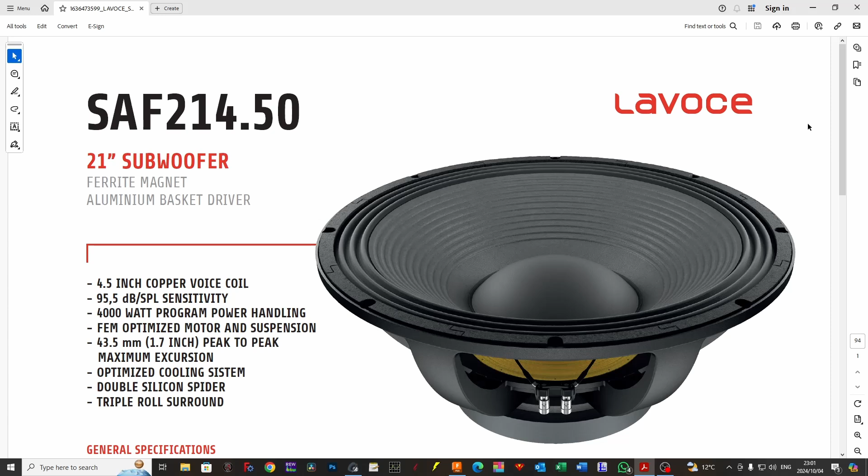So I want to cover a couple of things very important when it comes to making deep bass. One, 18s, while they go very low, if you want really deep bass, you need to get a bigger speaker, and 21s start to represent that better. And my choice for this is going to be a very well priced driver from Lavoce. This is the SAF214.50. I will absolutely emphasize this is not a premium driver out of the Lavoce range, but value for money. This driver is capable of going all the way down to 30 hertz and doing so relatively efficiently.

The downside, however, is the fact that this particular driver is recommended to be loaded into a box that is 300 liters. That is roughly the same size as a double 18. So keep in mind, you are going to be trading off a really big box for a single speaker just to get a little bit lower in frequency. That is something that a lot of the hi-fi guys understand, that if you want to go really low, you need a really big box, right? People like to refer to it as Hofmann's iron law, which I think is a terrible context about subs, but whatever the case is.

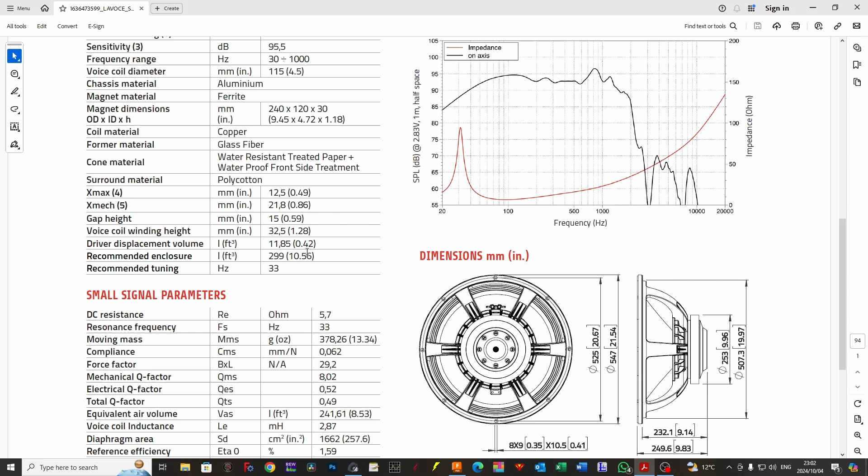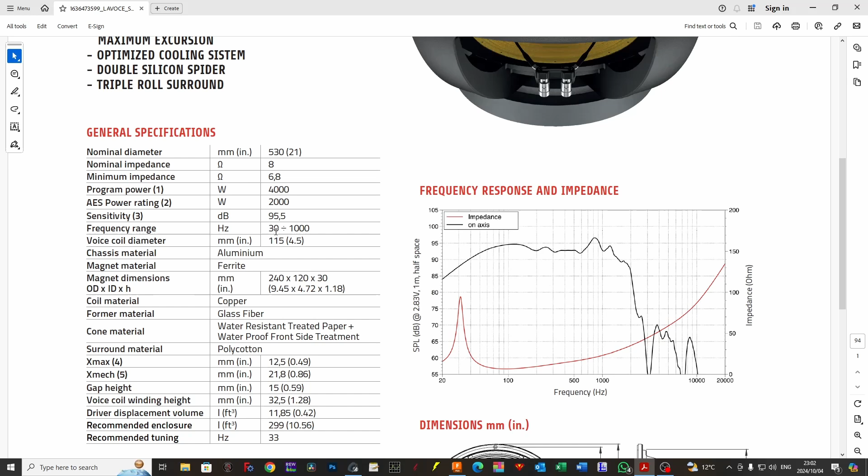So 300 liters tuned to 33 hertz is a pretty big box, but that's what we are going to need to get down to these low 30s. Typically speaking, if you have a subwoofer that can play down to 40 hertz relatively well, it will do so with absolute authority. However, as you come a little bit lower down to 35 hertz, 30 hertz, things start becoming pretty hard for any speaker, generally speaking.

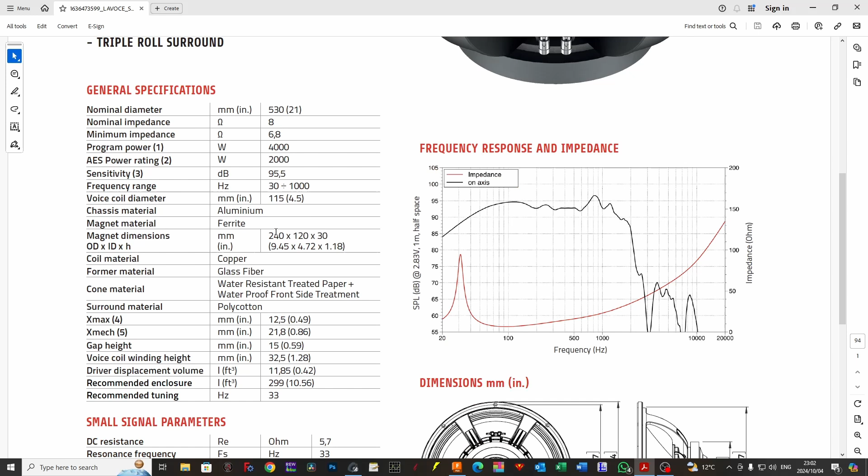So what I've done is I've already whacked the driver into a default WinISD cabinet, and I'm going to do this live with you, hopefully relatively quickly, because it is pretty late on Friday evening. I'm trying to squeeze in a few more videos.

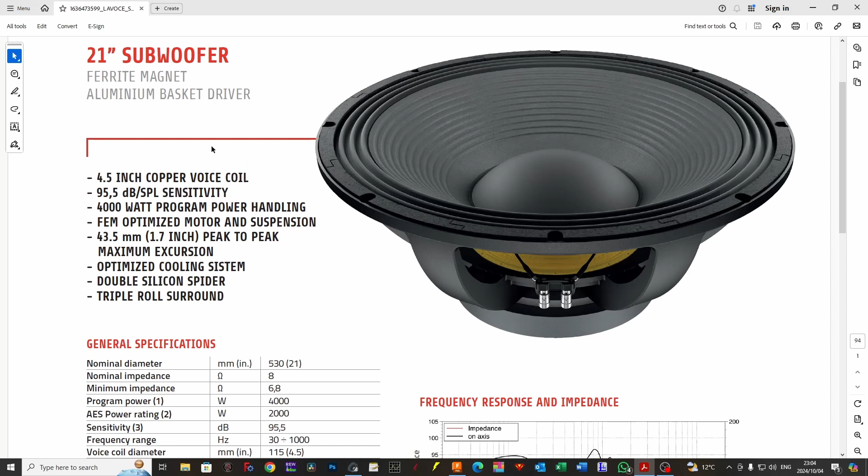Right, so we've got to jump into a couple of things here. Let's quickly have a run through of the driver. The driver has a 4.5-inch voice coil, so not the biggest voice coil, and I can understand why guys do that, because we're trying to keep the motor force relatively high. We don't want to increase the mass too much. Big voice coils means lots of length of copper. Things become heavy very fast. Inductance goes up very high.

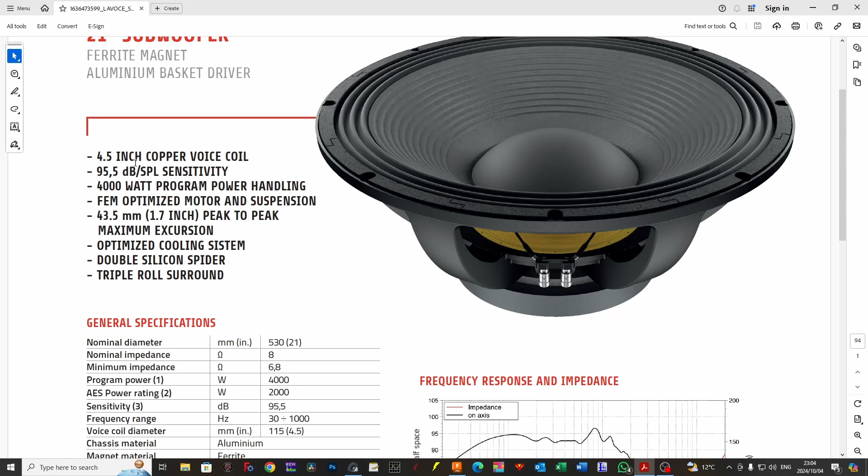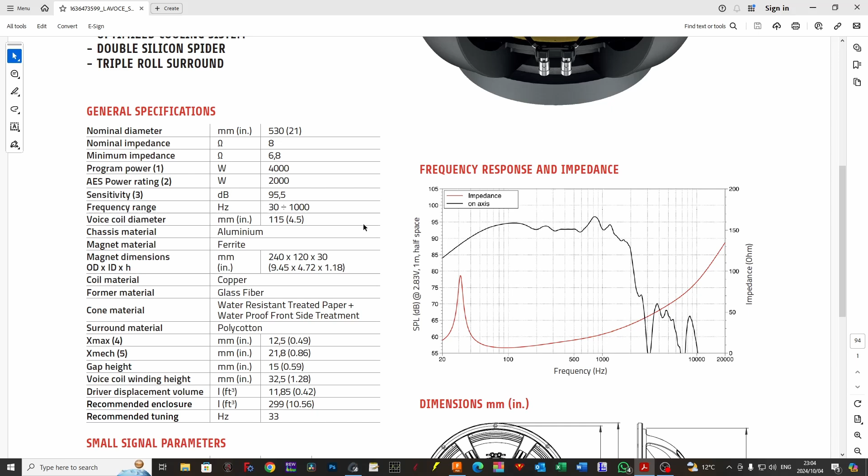4,000 watts program power. Program power is for sissies. We want to look at AES. So an AES rating of 2,000 watts. Typically speaking, if we put about 500 watts RMS into this with 6 dB worth of dynamic range, we should be floating around our AES. We can obviously put a lot more into that, so we just have to keep in mind that we are going to run into excursion and everything else. But if you want a happy-go-lucky driver, yeah, let's have a look here.

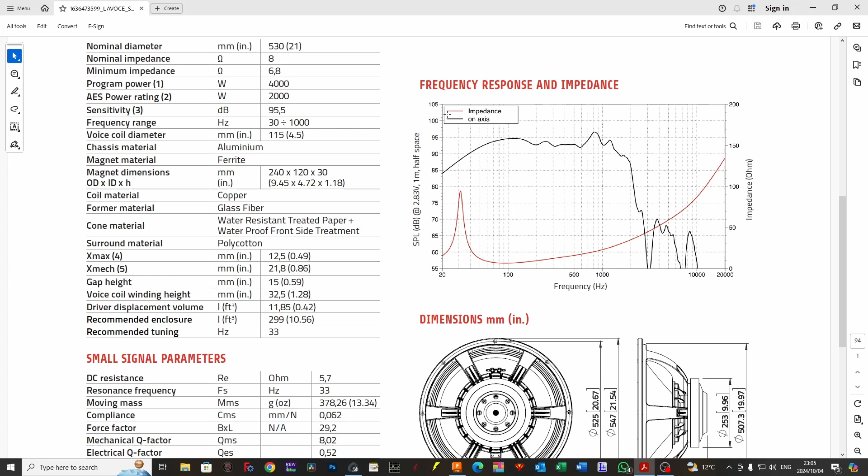All right, 12.5 millimeters of cone displacement. It's a fair amount of cone displacement. Again, guys, always look at the fine print, see how they come up to this X-Max value. It should come out to just over 8 mils: the voice coil minus the gap divided by 2. Yeah, so somewhere around about 8 mils.

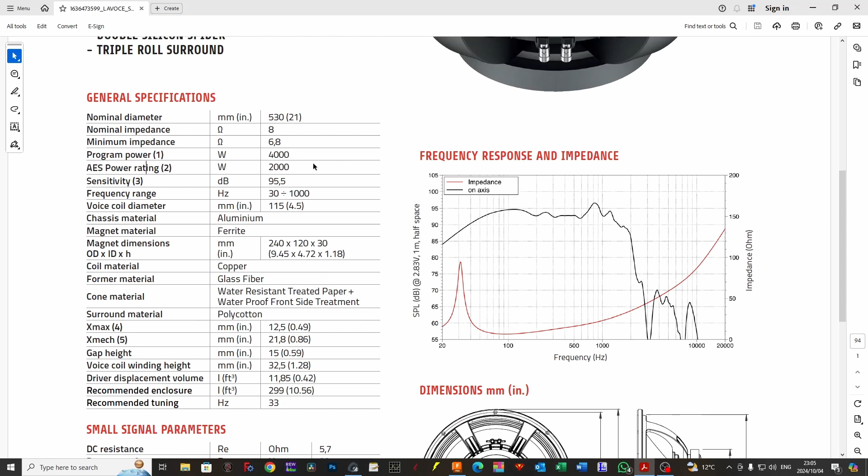Power handling, they are rated out to 2000. Okay, cool. So very important, again, I've mentioned in some previous videos, is the driver's resonant frequency, 33 hertz, which again is relatively low, right? Most 18s are like 35 hertz, sometimes a little bit higher than 40 hertz. This driver is a slightly higher Q, right? So electrically as well as your QTS.

Let's go and have a look at things like our cone excursion signal. Let's go and have a look. So they rate 2000, so I'm going to be guessing we're going to be sitting at about 1300, somewhere around there. A little bit short, 1400 watts. Okay, so how did I come out to 1400 watts? Well, basically I have used the box suggested volume, right, which is 300 liters tuned to 33 hertz, and I have just approximated roughly where I think X-Max is going to top out.

Now, something that is very important when you get into your speaker box design and using something like WinISD or any tool for that matter, guys, if you are tuning very low, it's important to understand that that driver will hit peak displacement sooner. So there is a fine line between how deep we go and how loud we can turn things up.

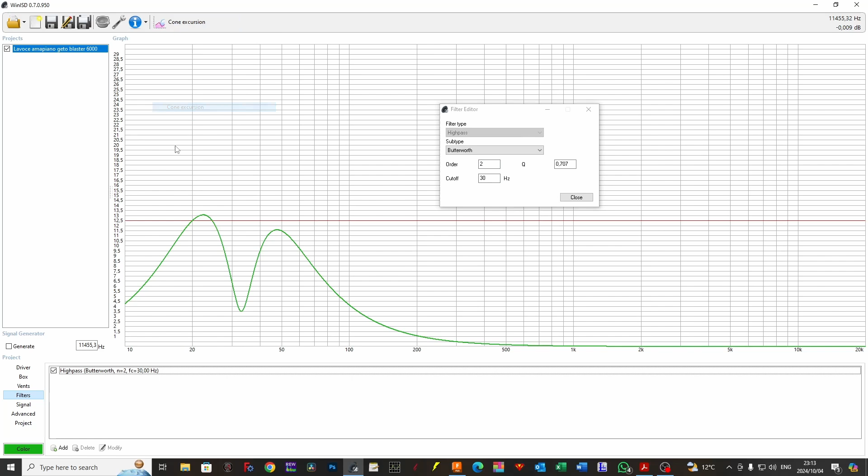So let's have a look at a third order versus our second. It's going to give me a hard time now. Third order versus our second. You can see that there is a very small difference. Now this would be a relatively good start at bringing in our cone excursion. So again, this is going to affect our overall power handling.

I don't like running speakers to the absolute limit because I want to avoid things like power compression and everything else. And if I have a look at 1,000 watts, which is half of our maximum rated power, that's a pretty high value still. Typically speaking, I might run somewhere around about 500 watts, maybe a little bit more. Possibly about 65, maybe 70 volts on the top side, depending on the amount of time that we're going to run things. So I'm kind of happy with the order that we have over here. I know somewhere in between that region, we're going to be keeping cone displacement relatively good. Our air velocity is also going to jump down.

So if we wanted to, we could in fact consider making this port a little bit smaller. So I could come in here and say 120. You can see we've shortened by 20 mils. Our overall port becomes slightly smaller, and our vent resonance is also going to push up, which actually is quite an important thing to bring up quickly.

Guys, it is very important, especially for the people who are doing hi-fi. Vent size is actually something that is quite critical, and a lot of times people get it wrong, purely because the resonance modes of your port will often start messing you around and will start floating in between your crossover points. And if you don't push it out high enough, especially if it's very audible, it's kind of stuck there. You can't remove it. Once it's there, it's there. So keep that in mind.

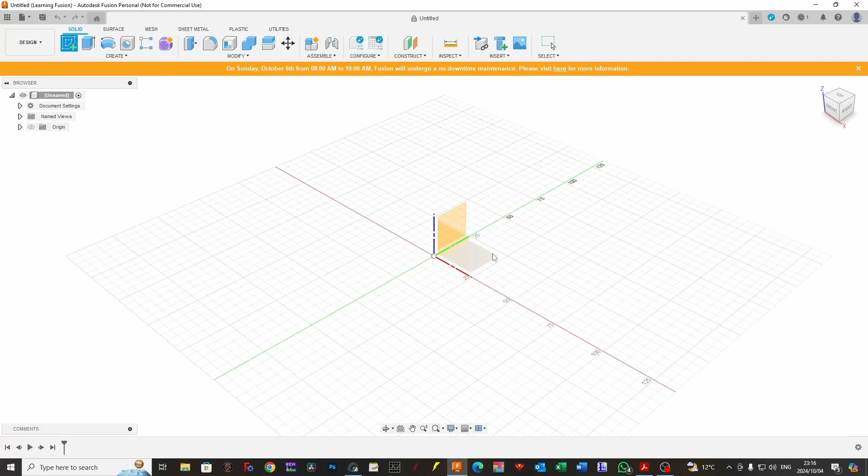Okay, so let's jump into our drawing package, which is going to be Fusion 360. What I'm going to do is look at the speaker from the top down, just to simplify things. Now, remember the size of our driver. We are on 21 inch, so we're 547 mils in diameter from the very top to the very bottom. So if we use a face that is roughly 600 mils, we 100% know that we're going to fit on there. So I am going to draw in some form of rectangle or square.

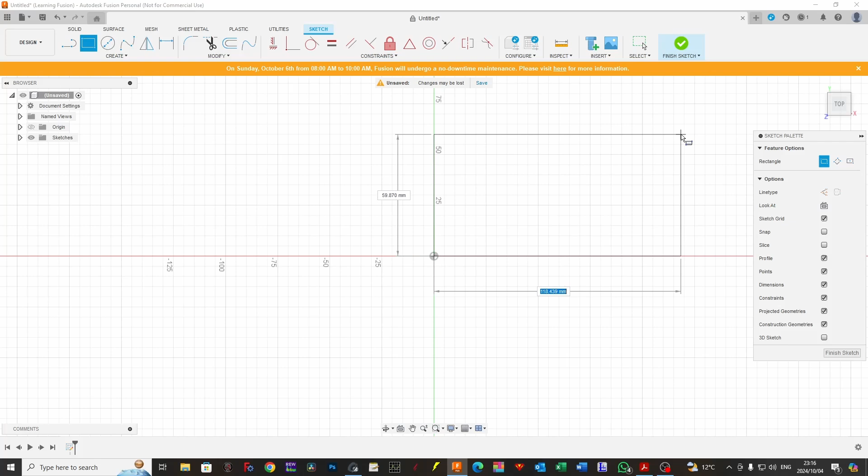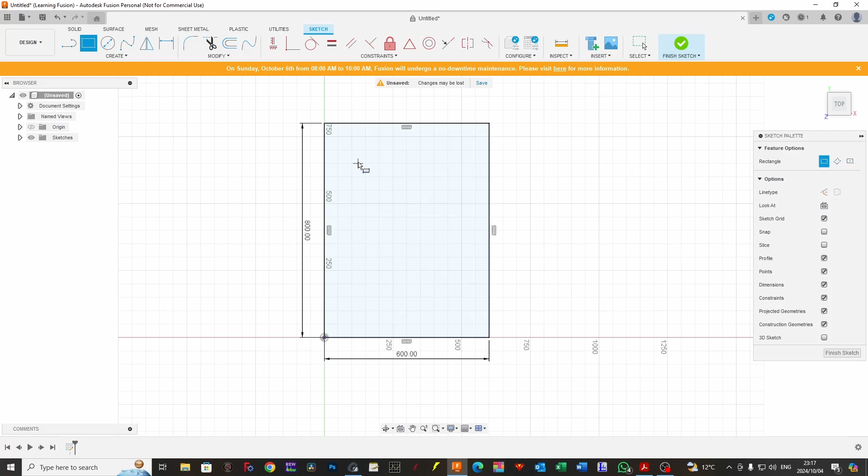I'm just zooming out quickly. So if we say 600 millimeters wide, and let's make this guy 800 millimeters deep, or 80 centimeters deep, and click OK. We now need to start adding in some more pieces to this. The first thing I'm going to add on here is some side panels. Again, we're looking at the driver from the top down. Now I can manually enter in the thickness of our material and snap things into place. Or I could do the following, and I'm going to just tell it that it's locked to that.

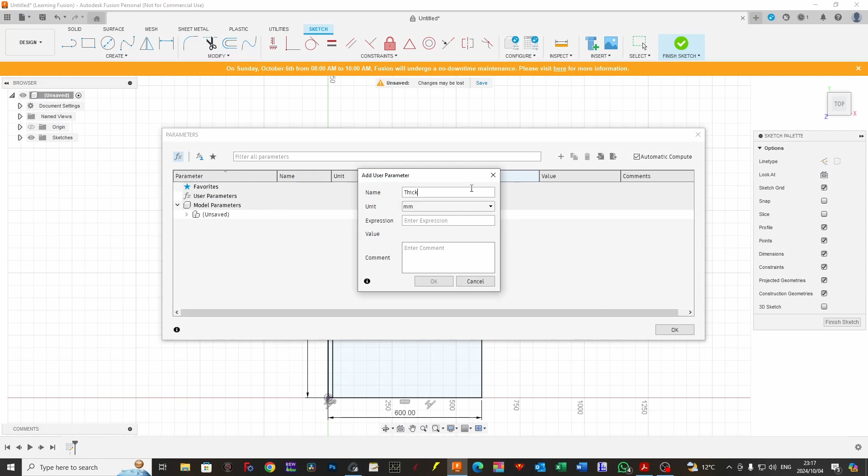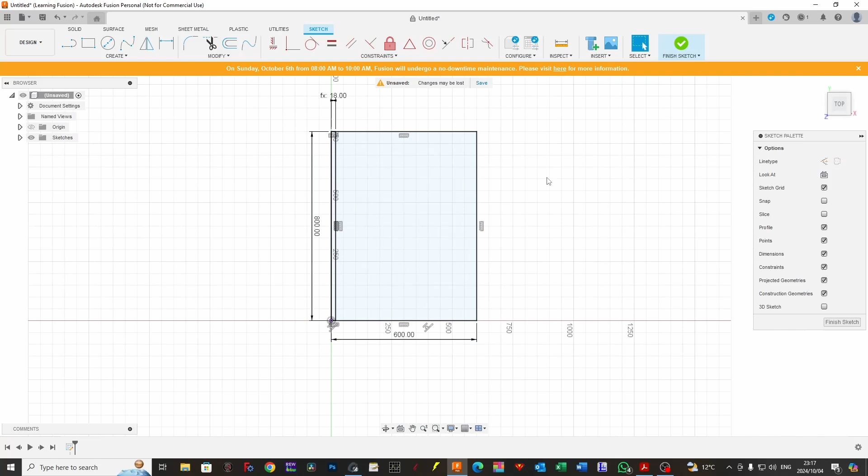I can also come down to here, change parameters, add in a new parameter, and I'm going to write in here thickness. I'm going to give this a value, in this case 18 millimeters, which is the thickness of our wood. I just want to come here and tell this that it must be the thickness of our material. The nice thing about doing it like this is we can change the thickness of our material at any given time, and it will actually change the overall size of our cabinet, which is really handy. Again, I'm going to just type in thickness, hit enter. It's going to lock that in. I'm going to come back down here.

This may be a long video, guys. I'm going to try and do this as quickly as possible and make this available to you guys.

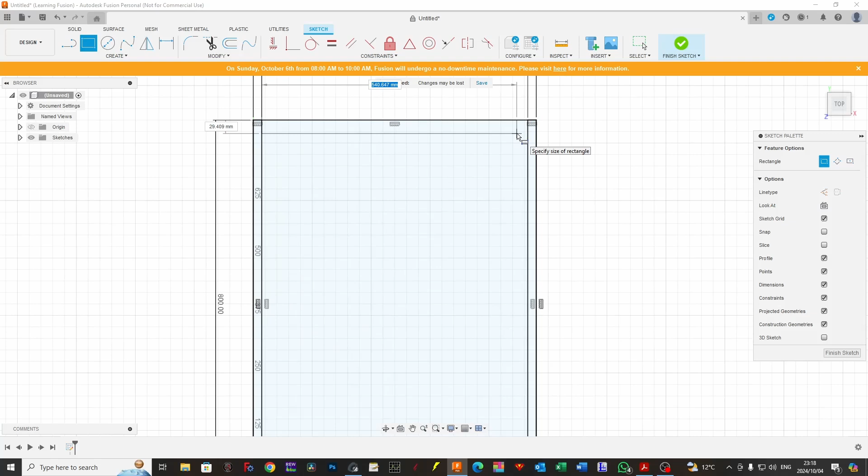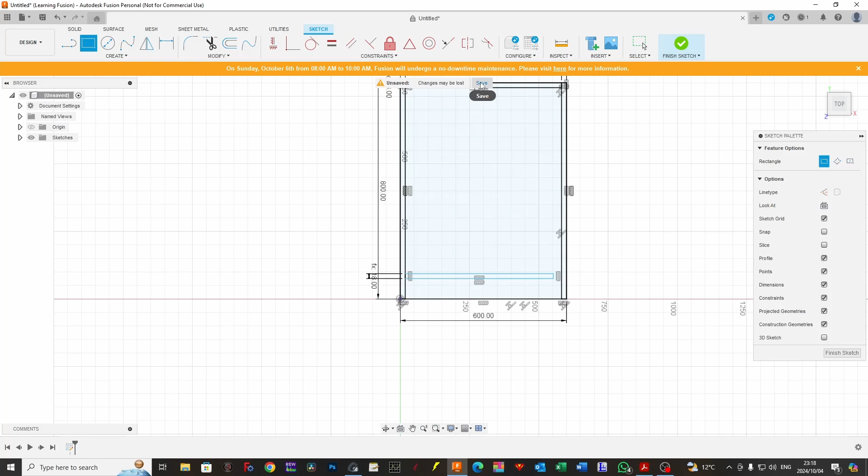Right, again, the same thing. I'm going to hit tab. I'm going to write in the thickness. I'm going to come there, and I'm going to say you need to join up over there. All right, now we need to put our face down. So I'm not going to come all the way to the front here. I'm going to come somewhere over here, and I'm going to say you need to be the thickness of the material again. I'm going to click that down there and snap this to the side. And you'll see that this still remains blue. In other words, I can move this backwards and forwards.

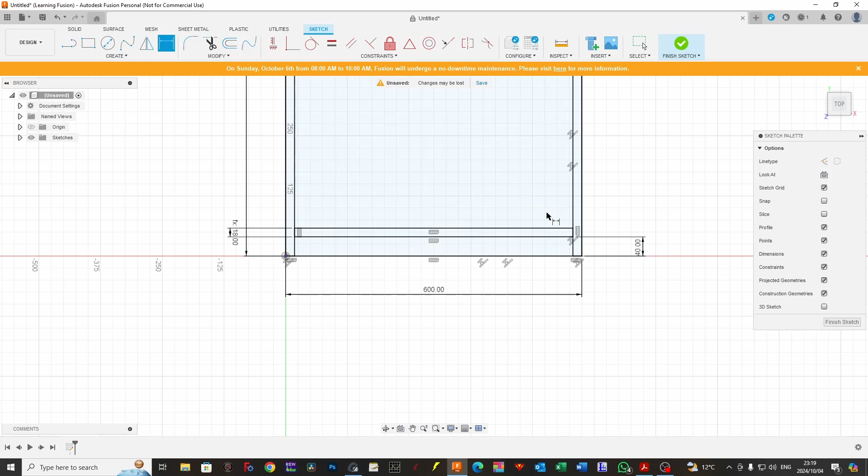So we need to give some form of space. What I'm going to do is make it like so, and I'm going to say, I want you to be about 40 millimeters from the front of that box. Bang. All right, now everything's locked into place, and we have drawn the basis of our sketch out. So if you can imagine, here is going to be the front of the speaker box, the side, the back, and the bottom. So I'm going to left click and hold, drag it across here, and I'm going to hit

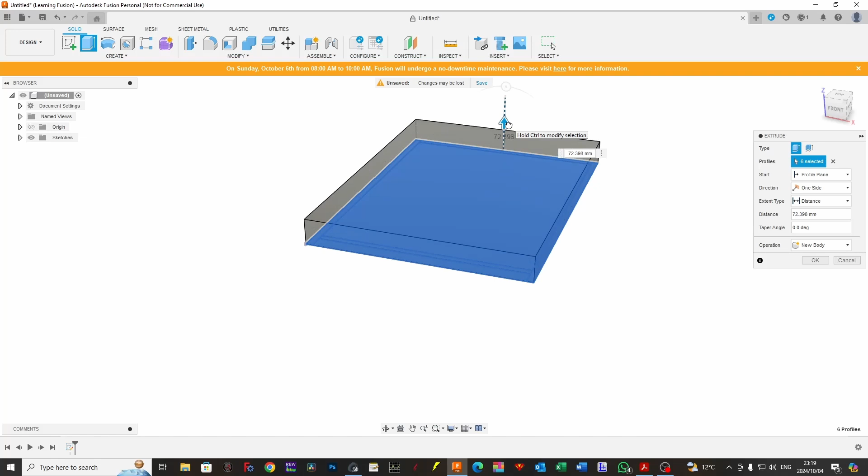E to extrude. Now you can see it's going to want to extrude up. What happens if it extrudes up is that my sketch is going to be at the bottom of the box. So what I'm going to do is come the opposite way around.

And I'm going to say minus the thickness of our material, hit enter, and that is going to give me the ability, if we come back here to sketches, for our sketch to remain on top. Now here's where things get tricky, because how do we work out 300 liters? All we have is a plank with some rough dimensions on them.

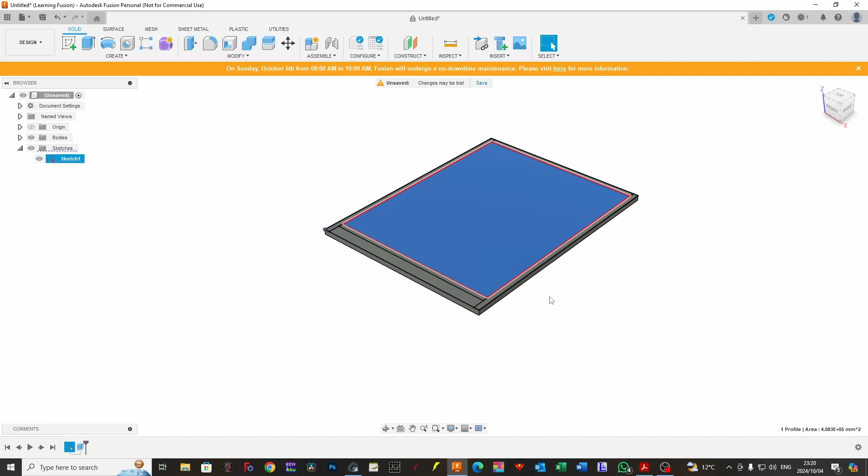Well, the fastest way to start to look at this is to start to extrude volumes. So let's just come up to the top here. We're looking at the box from the top down, and I'm going to hit extrude again, and give this a distance. Now we know that our speaker can fit on our panel width-wise, so we know 600 is going to work. You with me? Now let's consider that our port is going to be 120 millimeters in height.

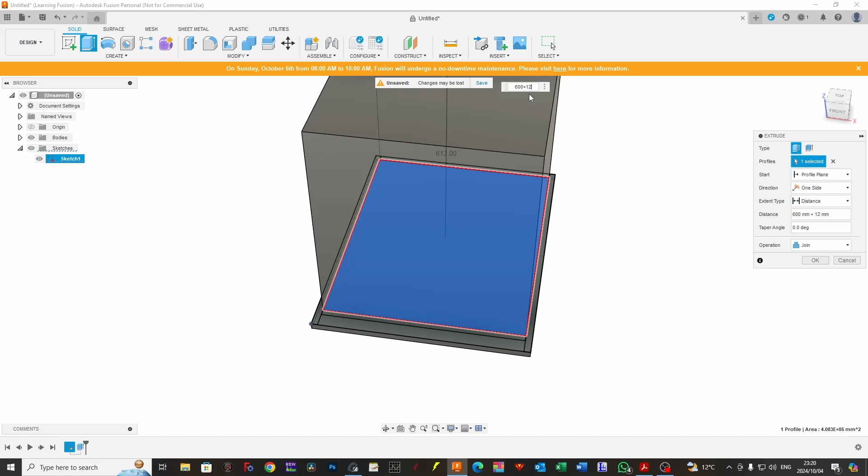So let's start adding in some extra stuff. We've gone 600 because we know that's what's going to fit, plus 120 mils, plus the thickness of our material, and in this case I'm going to write in 18. So our box internal is roughly 738 mils. But before I click OK, I want to go new body. Now what this has done is it's given us the inside volume of our cabinet. And of course we can change our box size at any given point, so hopefully we are close enough.

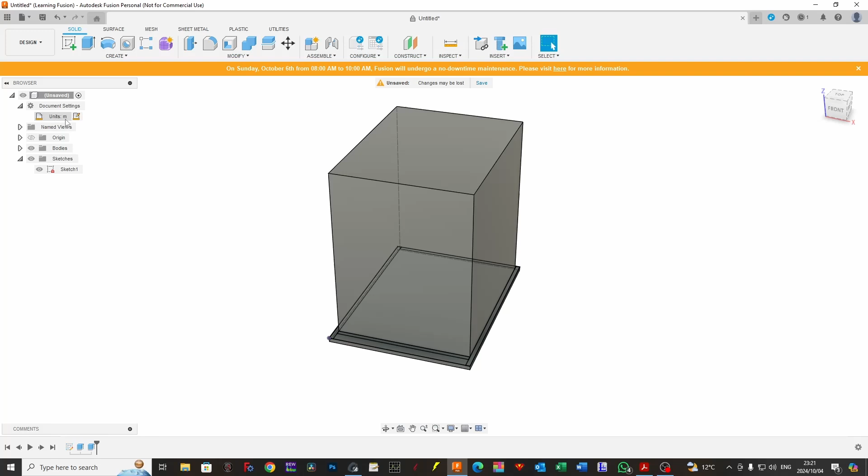I'm going to change the document from millimeters to meters, purely because Fusion gives you the scientific notation. If you're not used to scientific, which 99.999% of you are not going to be familiar with, it's going to be confusing as F. Okay, so what do we do now? We've now changed this into units of meters. Now I'm going to click on this body over here, go to properties, and you can see we have in fact come out to 300 liters.

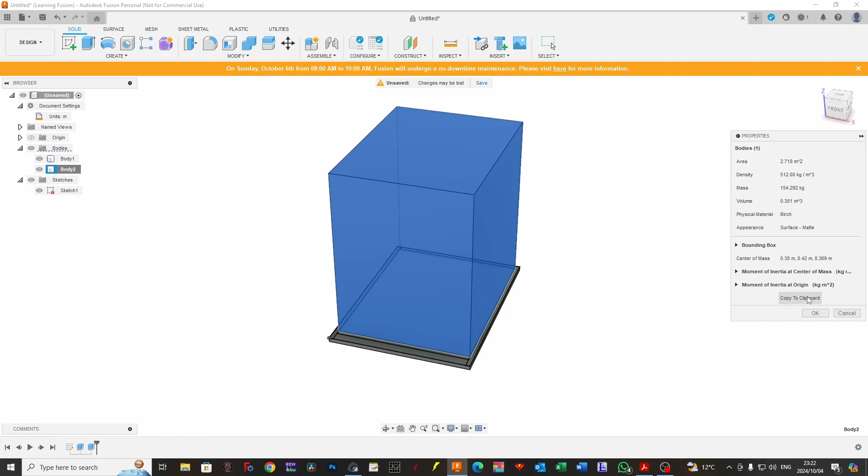Now remember, they said that our overall box volume needs to be 300 liters. This means that we need to make some changes, because we are going to start to add in our ports, and I'm going to leave this in here because I want to show you what's going to happen. So our overall height, I'm going to keep that in there for a second. I'm going to come down to our face and go extrude. I'm going to hold shift and click on the top here, and say new component. And you can see that is now 2 parts.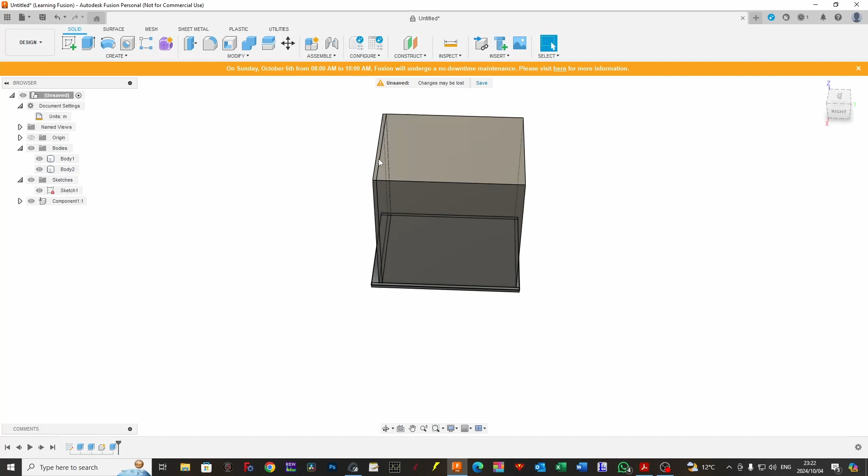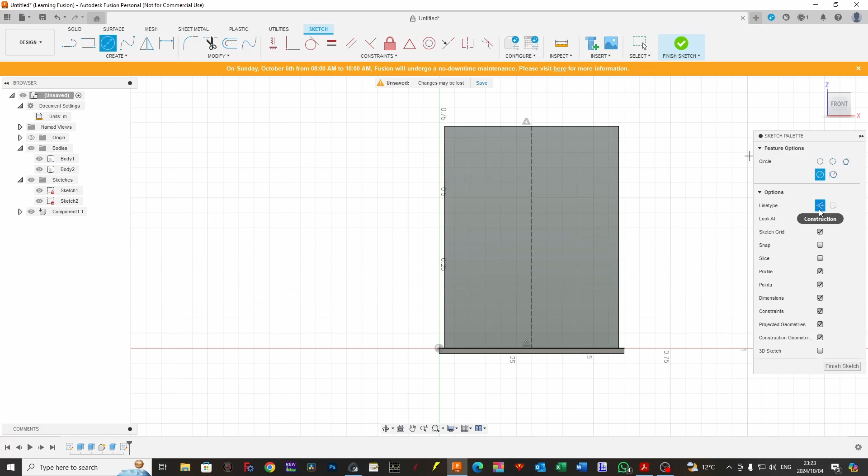Now I'm going to come back here and create a new sketch. So we know we've got our base, and we are going to draw some guidelines. I like to draw in guidelines. You don't have to. You'll see it brings up a little triangle. That means it's going to be on the square. When it's dotted lines, it is going to be a guideline. We don't need to actually draw that in. Let's go back over here. Our overall diameter on our speaker was 547, so let's make that 547. Where are we? Losing my space here.

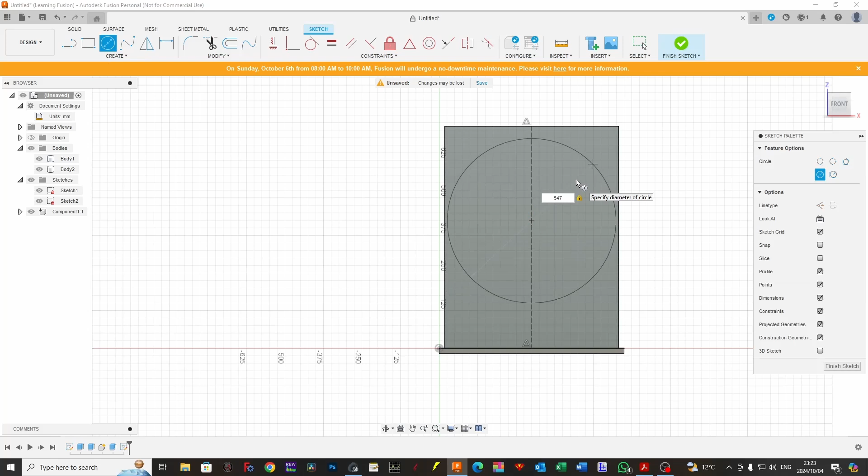Let's just change this back down to millimeters so you guys can see the process. So 547, we are getting close to building our AmaPiano Geto Blaster 6000, gents.

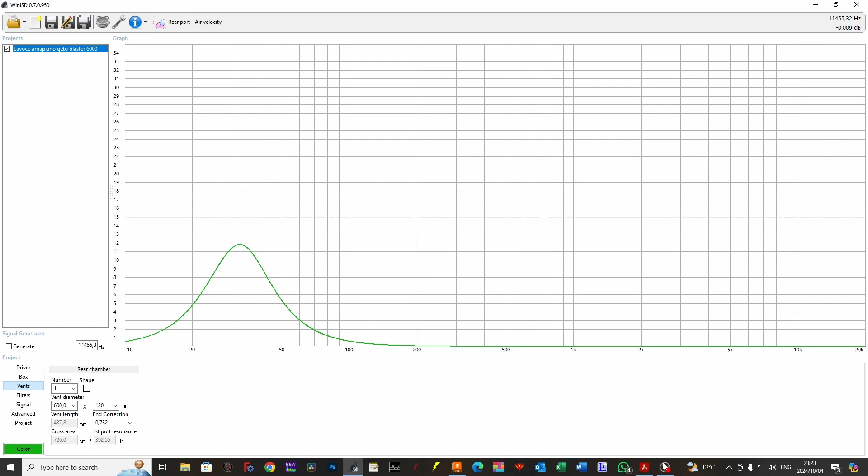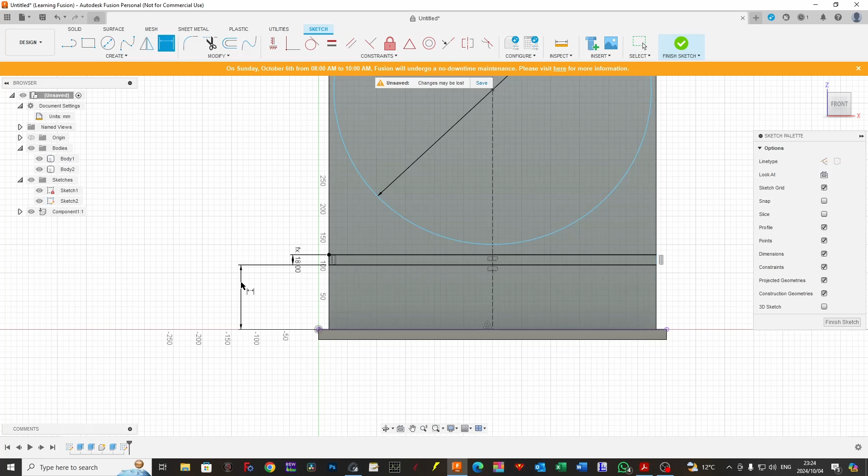Okay. Our ports, what were our ports? Our ports had an internal height of 120 mils. So we're going to come back here and draw in 18 mils somewhere over here. And we're going to say tab, this must be the thickness of our material. And I want to say that from here to this line over here must be 120 millimeters. Okay, so you can see everything fits on quite nicely.

Now here's where things get complicated, fellas. Remember, we had 300 liters exactly. How deep was our port? Our port was 437.8, so we're going to make it 438 mils. We're going to go extrude minus 438 millimeters, and we're going to cut that space away. Making sense?

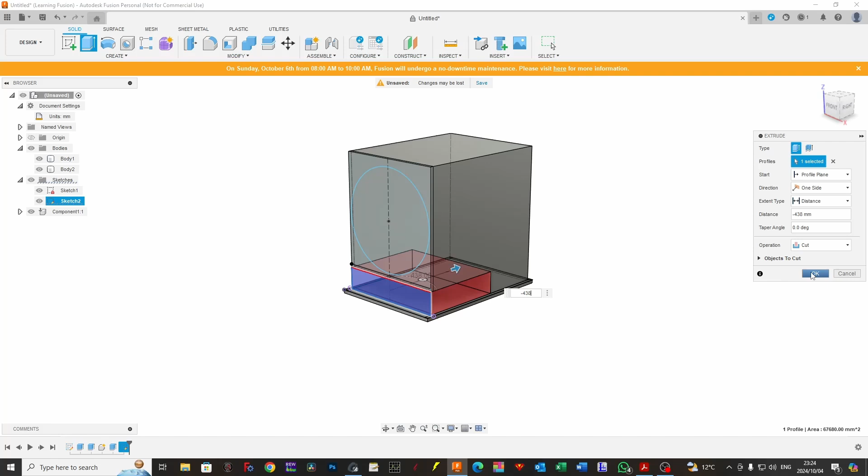Okay, now we're going to go back into meters. Actually, let me show you. Bodies, properties. Can you see how I was saying 2.729 E plus 08? With a bit of practice, it's comfortable to say that we are 272 liters. So you can see we just don't quite have the volume. It's easier to look at it in meters as you begin. It really does simplify the volume side of things.

Properties, and you can see straightforward is 0.273, or 273 liters. So we need to make our box a little bit bigger, because remember, we're still going to minus like 11 liters off of our cabinet.

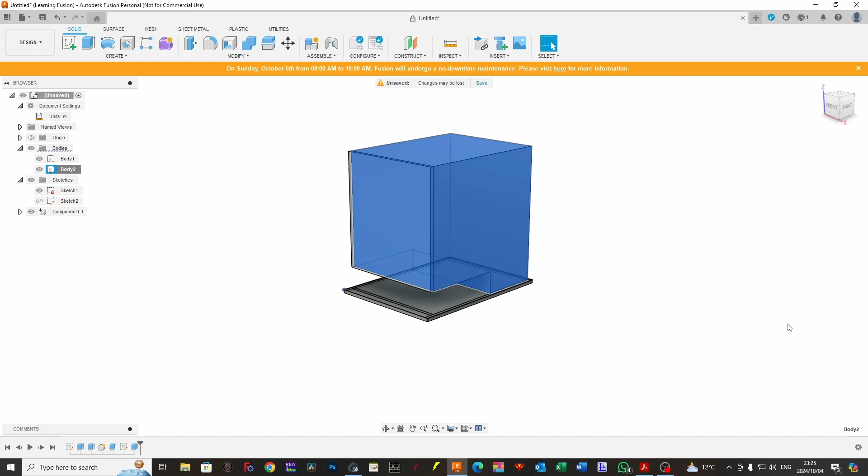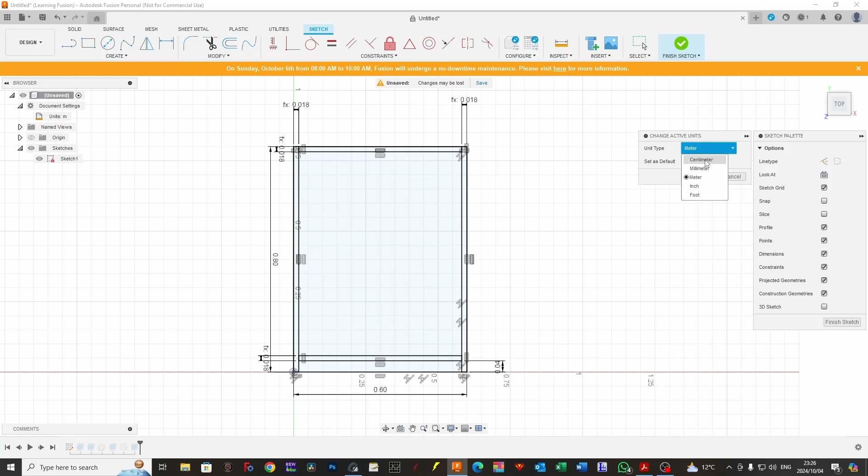So what I'm going to do is I'm going to come to my sketch. Now I have a couple of options. I can in fact make this a little bit deeper. So let's do that. Let's make this 900 millimeters, right? Ooh, failed because it is locked. Now remember those constraints that we had in, right? Because of these constraints, we are locking things over here.

So what I'm going to do is I'm going to put in some new parameters, right? And I'm going to say depth, right? And we currently have a depth of 800, so we're going to work with 800 just to keep it simple. So again, I don't expect you guys to follow along, and I'm going to write here depth. Okay.

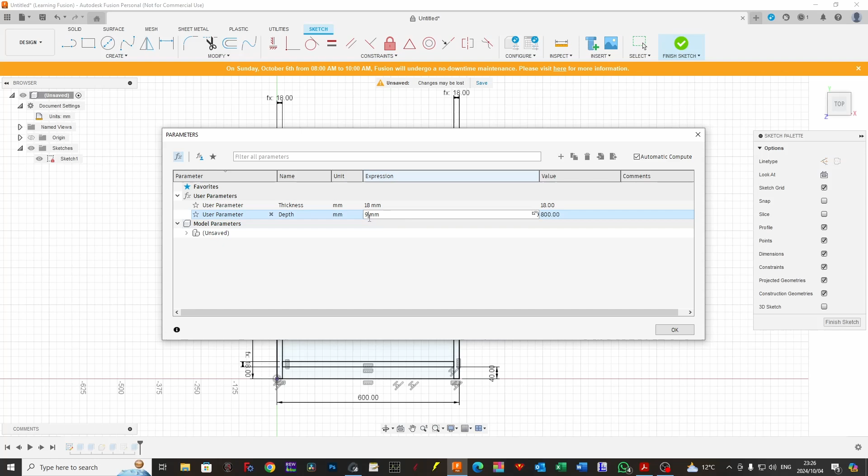Now if I come in here, whoops daisy, actually not there, I can come down to here, and I'm going to change this from 800 to 900. Did you see our box got bigger? So what I can do is I can come back into our sketch, right? And you have a look, our volume has in fact followed through with the entirety of our cabinet. So now if we have a look at our properties, we are 315 liters.

Let me change this again back into meters for you guys, so it's a little bit easier. Right, there we go, properties. And we are 0.315 meters. And our driver is going to take up 11.85. So let's come here and start typing in calculator.

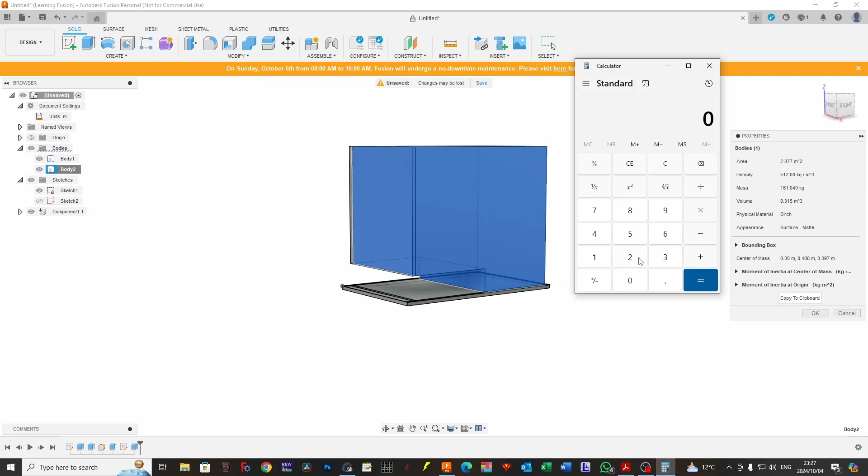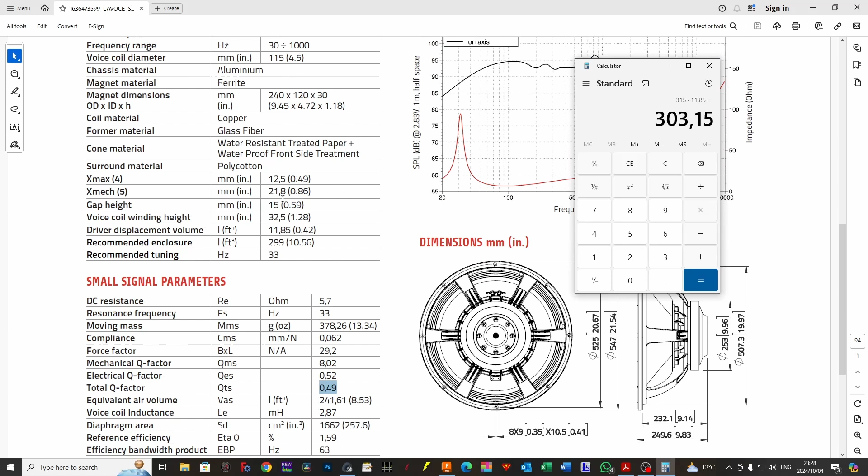Right, and we can type in 0.315 or 315 minus our speaker, which was 11.85. 11.85 brings us down to 303 liters, which is very close to our 299 liters. Now I know I'm going to put some bracing into this cabinet, and the likelihood is I will start to drop out this 3 liters pretty quickly.

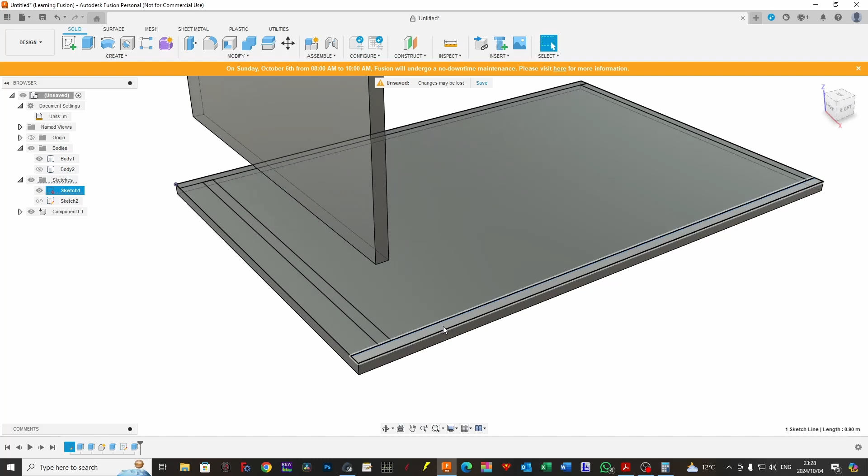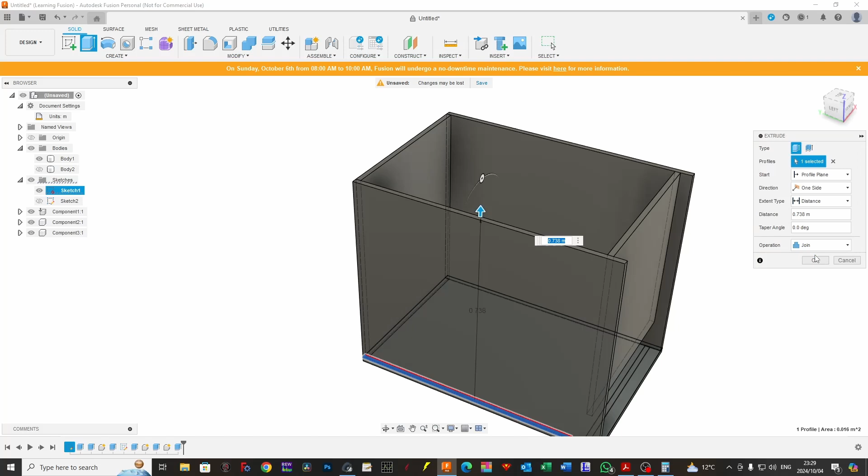Okay, so now that we know that our sizing is roughly in place, I'm going to remove this guy over here. You know what, we'll keep it, we'll just hide it, right? So I'm going to continue with the rest of our box. I'm going to click here, I'm going to go E to extrude, come up to here, and I'm going to say new component. Now I know this is possibly not the right way, but this is the way that I do it. Everything is supposed to be in bodies, and bodies generate more components, and blah blah blah. Yeah, I know, right? But for the sake of things, I get it done in any case, right?

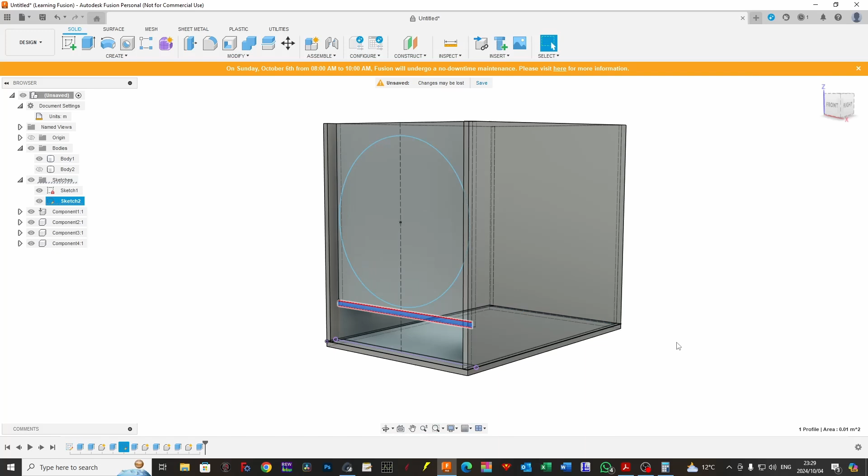So we are missing a sketch. Now remember, we have our body, right? And we did not remove that volume from our body, because this in fact is going to come out. And we can do this actually in two ways. We can come over here, we can extrude this by, what was our depth on our port again? 437 mils.

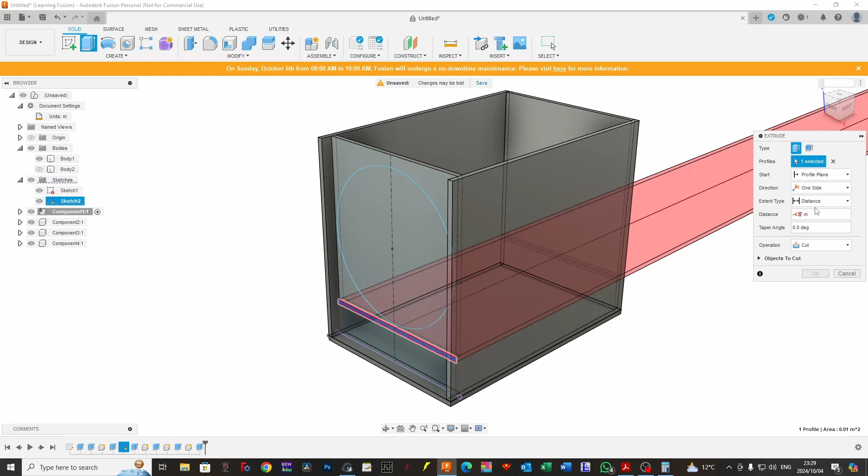Okay, minus 437 mils. Whoa, somewhere along the line, oh yes, we are in meters. 0 point. Right, and we can cut away because we do have a volume there, or we can simply just go new components, and there's our port. Right, so here is the basis of our box, and now we need to put a top on here.

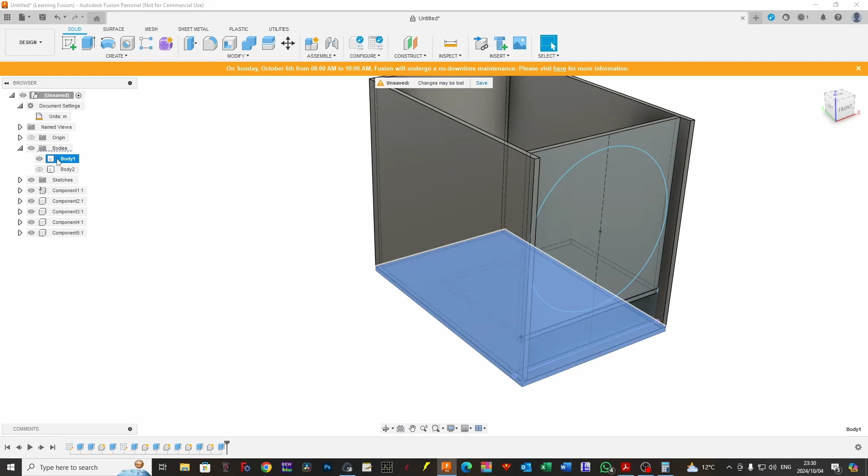So there's a couple of ways you can do it. The way I'm going to do this right here is I just want to make like so, and this was our first body that we extruded. For the sake of things, I like to invariably convert this back into a component, but we don't necessarily have to. I'm going to copy this, and I'm going to go right click, and I'm going to go paste.

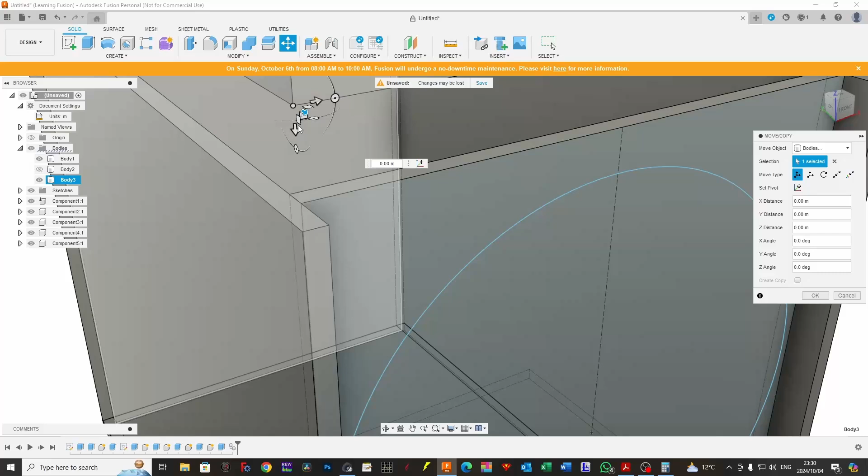Right, now I can grab this, I'm going to bring it all the way up here. I'm going to come over here, click on that corner, say okay, and I want this to come down. Right, and I'm going to go point to point. I'm going to click on that point, click on that point over there. It's going to lock everything in place, and there you have it, guys. There is very quickly a box for a 21-inch super AmaPiano Getto Blaster 6000. So pretty straightforward. Hopefully that made a little bit of sense to you guys.

I will make this available to everyone. For the sake of this, I know it's going to already be a long video, but I'm going to show you some of the other processes that I'm going to do as we lay things out.

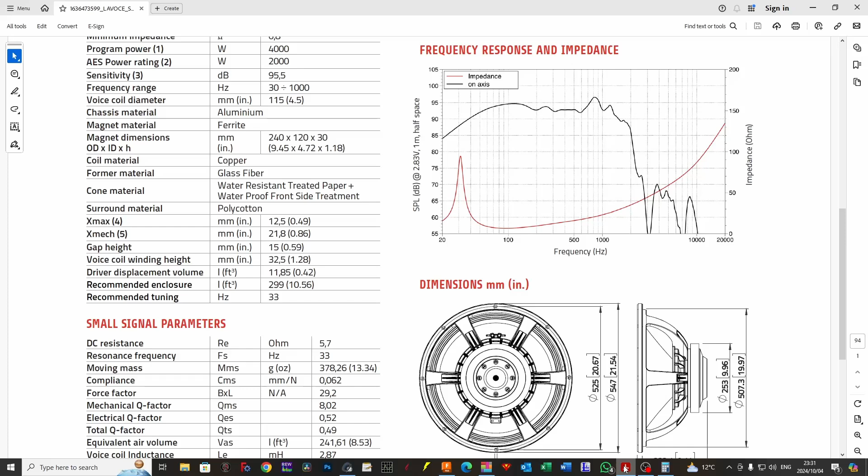Next thing we need to consider is, how much material are we going to use? I know a lot of you guys are going to use shutter plywood, which is the shattest of plywood in the market. Guys, stop using shutter ply. I understand it's plywood, but there are better plies. Spend the extra money, guys. I promise you, it is so worthwhile. That plywood has been designed to pour concrete. They put it down as a barrier, you pour concrete. It's throwaway material, not necessarily good for speaker boxes.

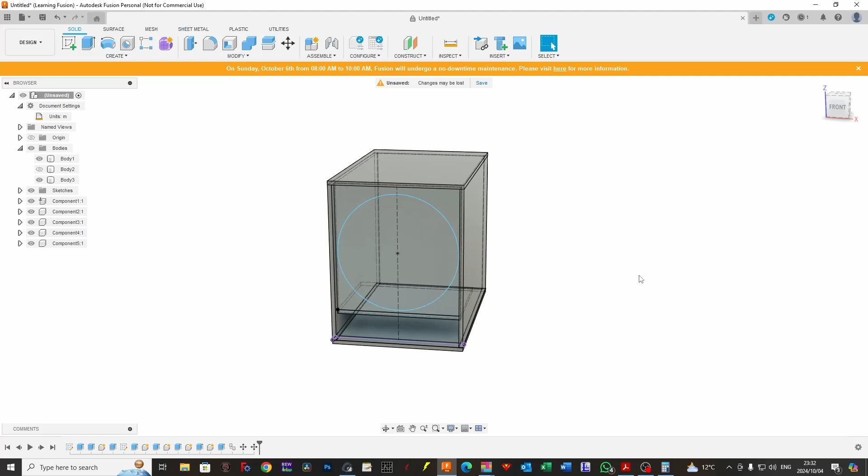Okay, so we need to add some items. Let's give this thing a name: top and bottom, right? Now we need to take some of these dimensions and enter them in here. We're going to go inspect. Let's change this back into millimeters, because that's how we do things. So we are 900 deep by our overall width, which is 600. So I'm going to come back here into our tool, and say the length is 900, our width is 600.

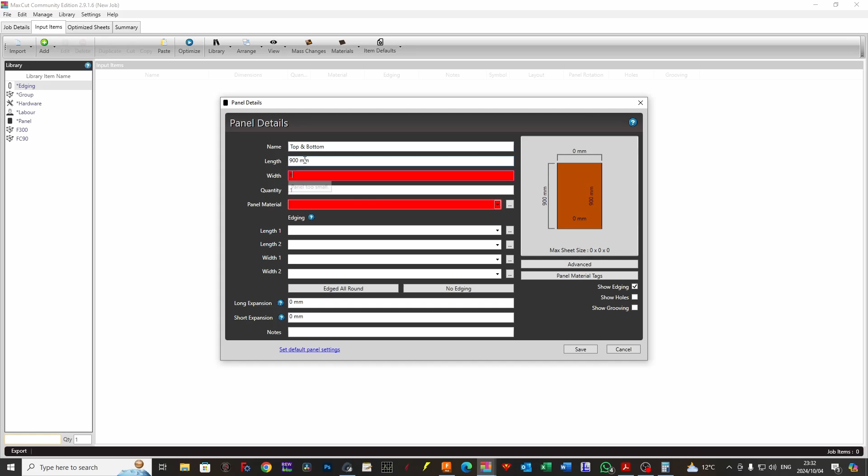There's a top and a bottom, so I need to have this times 2. We need to select some form of material, and I'm just going to go plywood for the sake of plywood, and I'm going to click save. Now what else do we need? We have our top and our bottom.

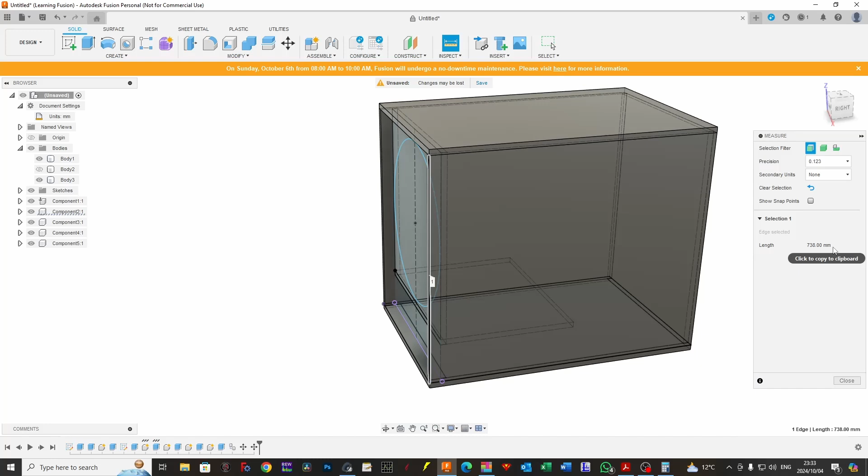Okay, let's consider our side. We know we are 900 deep, so we don't need to take that measurement twice. I'm going to click on this side panel here. We are 738 tall. So I'm going to come in, add side panels. We're 900 long by 738 millimeters tall, and there are 2 sides to our box, and I'm going to click save.

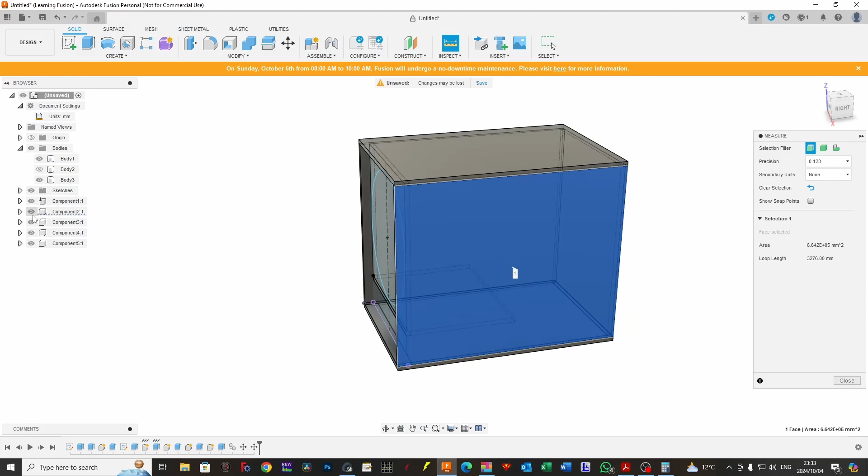So we're going to come back here. What else do we need to do? I'm going to hide this component over here just to simplify things, and hide this component over here because we've already added these things in. So I'm clearing up my view so I don't confuse myself. You don't have to do that, but I just do it in any case.

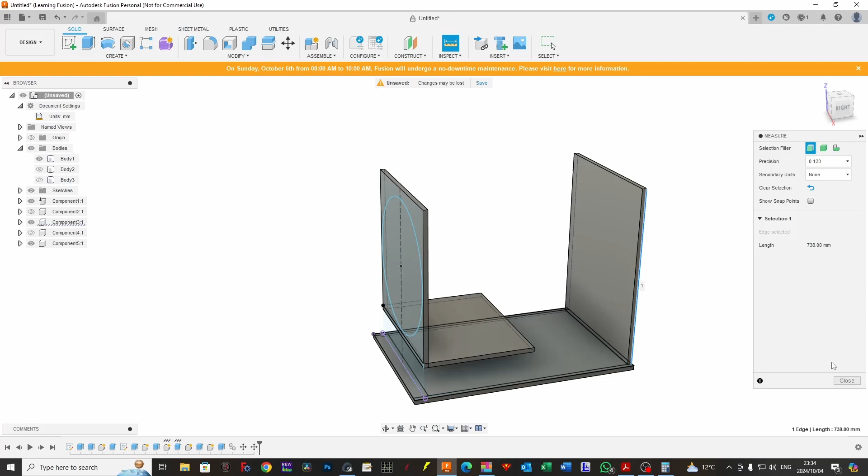So we need to measure out a rear panel. We know we are 600 wide, again by 738. So let's come up here, and we're going to go add rear panel. We are 738 by 600 millimeters wide. We only have one rear panel. Okay, so we can do it like so. Let's remove this guy over here.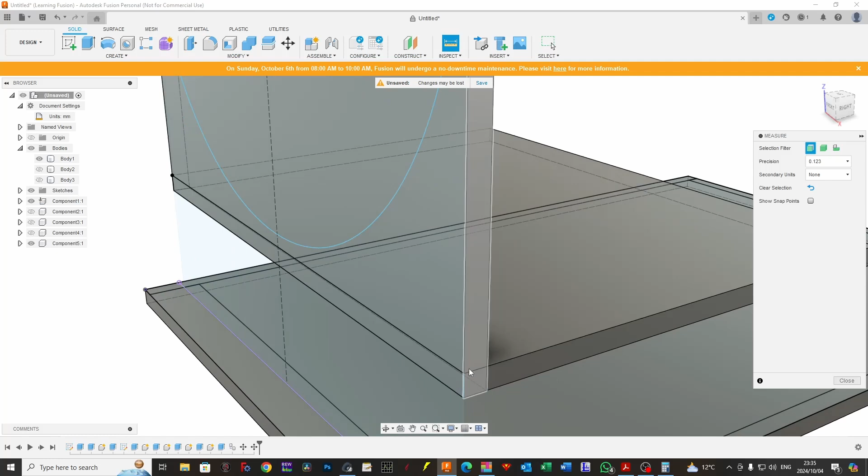We need to take the dimensions for our face, and we are going to be not 738, my friend. Hang on a minute. I see a small problem here because I didn't do that right for you guys in the video. Okay, so the height of our face is 582 millimeters. Just be aware, guys, there's a problem here because I didn't cut this off, but for the sake of this, you should be fine. So we were 582. Add the face, which is going to be 582 by 600. We're going to hit save.

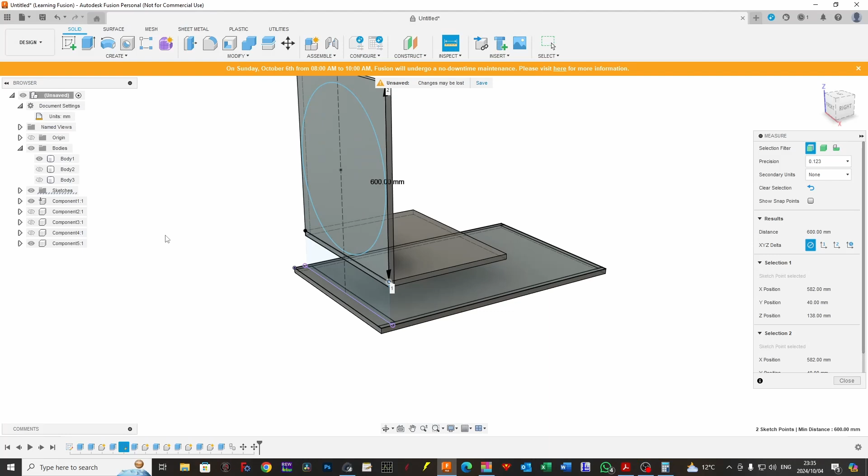Now the last thing we need to do is to add in our port. Again, it is critical on a cabinet this size to put in bracing. You don't want to have a box with no bracing in, generally speaking. So we are going to go from this front section over here all the way down to over here, which is going to be 437.

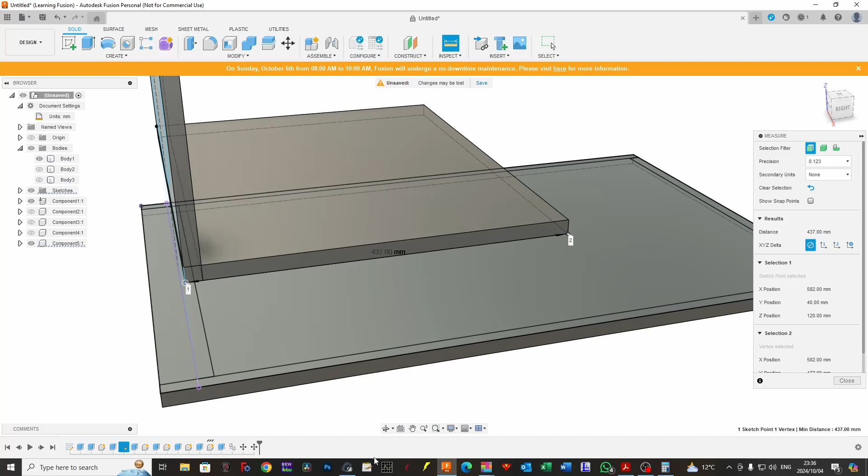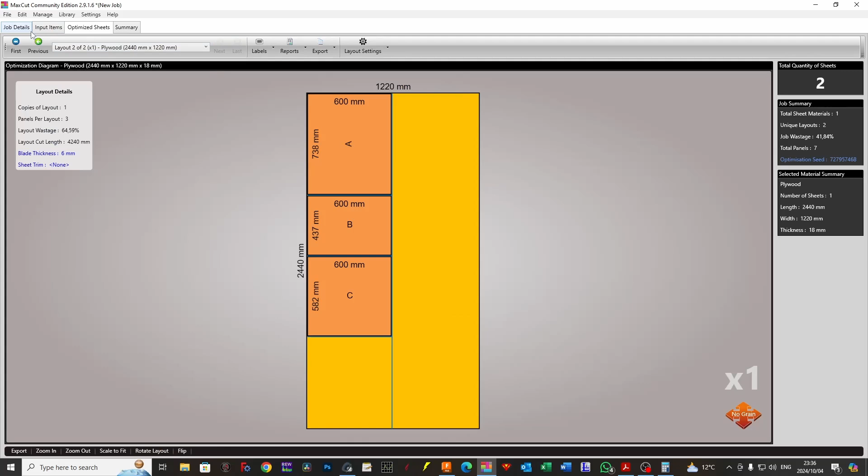So again, coming back to our software, we're going to go add. This is going to be our port, and we are going to have a length of, what is it, 437? Was that right? 437, let's have a look here. 437. I'm not too worried about the 0.8, to be honest with you. 437 by 600. Okie dokie. And we are going to go optimize, and you can see we are going to be 2 sheets for one of our Ghetto Blaster 2000s.